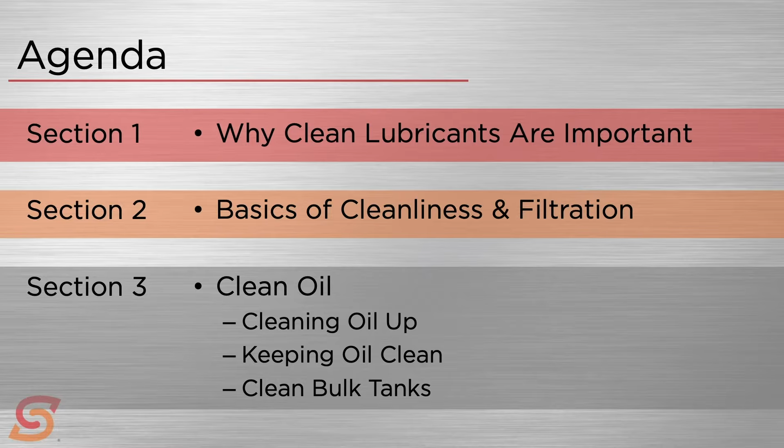So that's our agenda for the day, and we'll have a little question session after each one of those sections. So we'll kick off here with the need for cleaner lubricants and what drives the need for clean oils.

If you distill it all down and summarize it, it really comes down to component life, okay? All the different pieces of equipment, how long they live before they have to be repaired or replaced, the mean time between failures of things.

Your costs involved in that include, but are not limited to, just the cost of equipment, right? It's not just the cost of the hydraulic pump, the cylinder, or the gearbox, but there's also the cost in fixing and replacing it, the labor involved in that.

And then there's also the cost of overall downtime that it may cost your facility or your fleet. These costs are all important, they all add up, and they all trace their way back to the cost of the performance and the longevity of the individual components themselves.

So within a system, at least that's lubricant related—now we're not addressing all systems, we're sticking to the stuff that we deal with, lubricant related stuff—what are the more vulnerable components? What are the kind of things we're talking about when we talk about component life?

Well, most of these things are oil lubricated, particularly where the lubricant film is very small, because the smaller the lubricant film between two surfaces, the more impact a piece of dirt is going to have, right? That stands to reason.

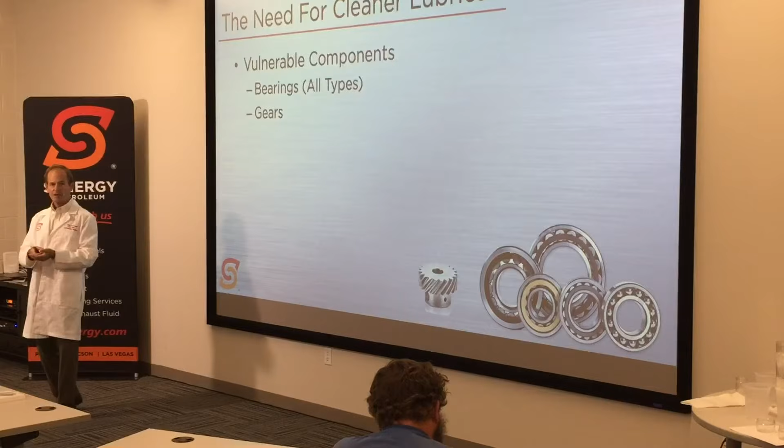Hydraulic pumps, okay—vane pumps operate at high speeds and high pressures with the tips of the vanes running against the ring. That's a very, very small clearance in there. You can wear out pumps very easily that way.

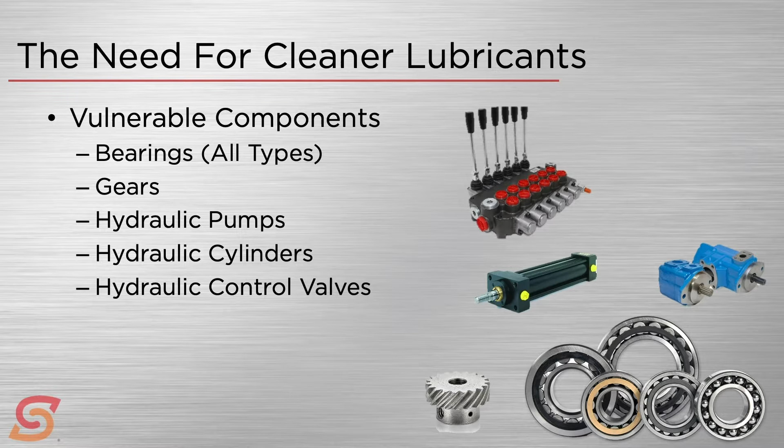Hydraulic cylinders—think of the openings in hydraulic cylinders and how many hydraulic cylinders leak because contaminants get into the hydraulic fluid. Hydraulic control valves are probably some of the most critical in terms of cleanliness, because the openings...

If you look at particularly a complex hydraulic control valve, lots of things like spools going into very carefully machined openings—this is 10,000th of an inch type tolerances or less. Just a little bit of dirt can cause spools to stick, and once spools start sticking in a control system, your control is compromised.

Another thing that happens in these hydraulic control systems with contaminated oil is that even very, very tiny particles rushing through a hydraulic control valve at high speed are kind of like a blasting media.

I mean, yeah, it's in slow motion, but if it's going under high pressures and high speed, you end up rounding the corners of some of the machined parts inside a control valve. And when your control valve channels start to get rounded corners, you lose some of the precise control you might be relying on from that valve.

You know, there are full day hydraulics courses just on control valves and doing this kind of stuff, so I'm not going to try to take you there, but hydraulic control valves are very critical to cleanliness.

Seals - a good way to damage a seal is to have dirty oil going through it. You get a nice soft seal working there, get some abrasive in there to wear it down really quick, and now your seal's no longer effective.

And even hydraulic hoses - some of this goes back to the media blasting example I was mentioning before. A lot of contaminant going through can weaken hoses from the inside. So that's the need for cleaner lubricants from a component and component failure perspective, because these are the things that'll cascade and cause some other problem that'll cost you your downtime.

How do we know, but how do we quantify what clean oil can do for us? How do we know that clean oil will make our components live longer or last longer? Besides the intuitive stuff, is there some evidence that this really happens this way?

They also sponsor and put on a couple of large industrial reliability and lubrication related trade shows every year. They send out weekly newsletters, as well as offer their consulting services. They've been around a fairly long time, very well known, certainly in the industrial world.

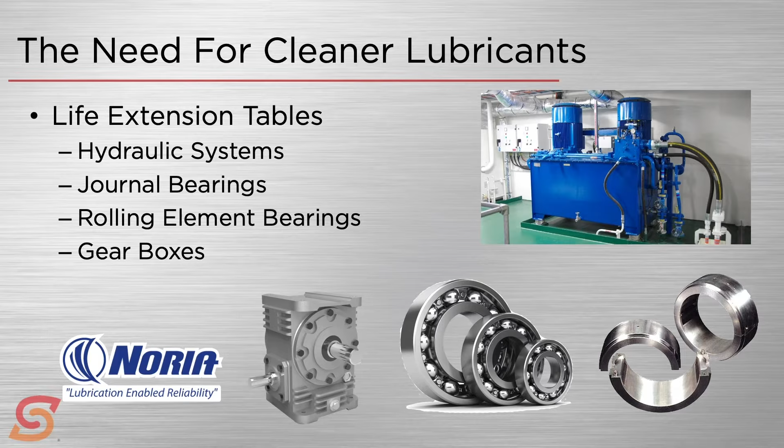So they come up with these life extension tables, and this is a life extension table, and this is how it works. It's pretty straightforward once you understand the gobbledygook, and you do have to understand the gobbledygook behind these ISO cleanliness codes, and we are going to touch on those in the second section. So just kind of follow with me for now.

But if the current oil you're getting now - we'll call this oil straight from the drum, typical oil from the drum - let's say is about... if that pointer's not going to work, maybe I'm using the wrong end. No - this oil is 22-20-17, okay? This is not filthy oil, but it's not clean oil exactly either.

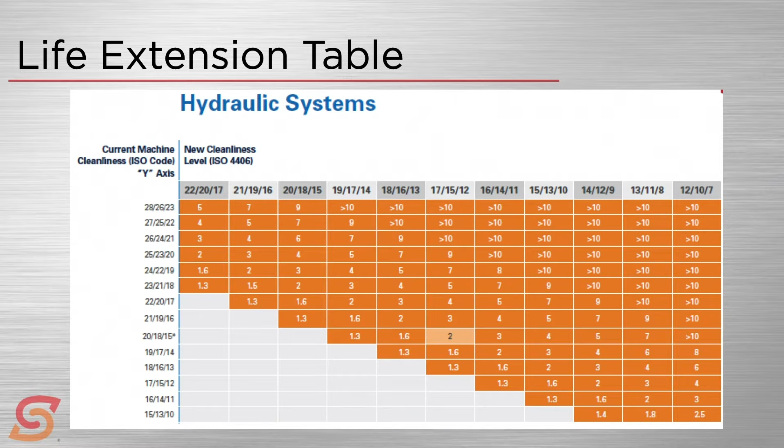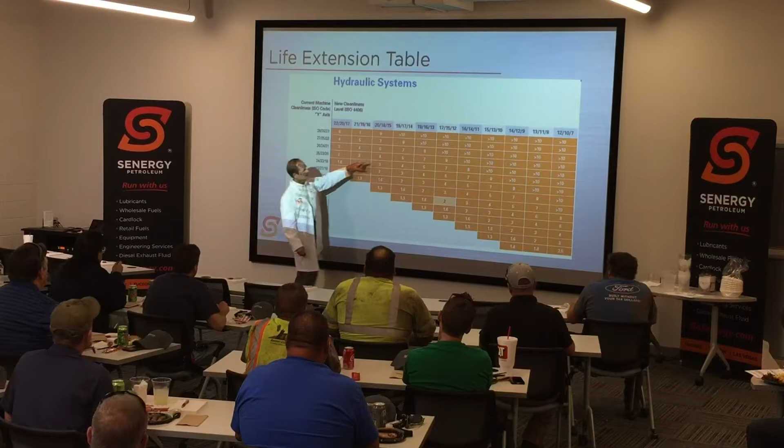But if you can take that oil that you're running in your hydraulic system and filter it, clean it up a bit, and get something a little more respectable, such as 18, 16, 13 - and hydraulic oils actually can clean up down to this range, hydraulic oils are really good at getting clean if you want to - but if you can go from 22-20-17 to an 18, 16, 13...

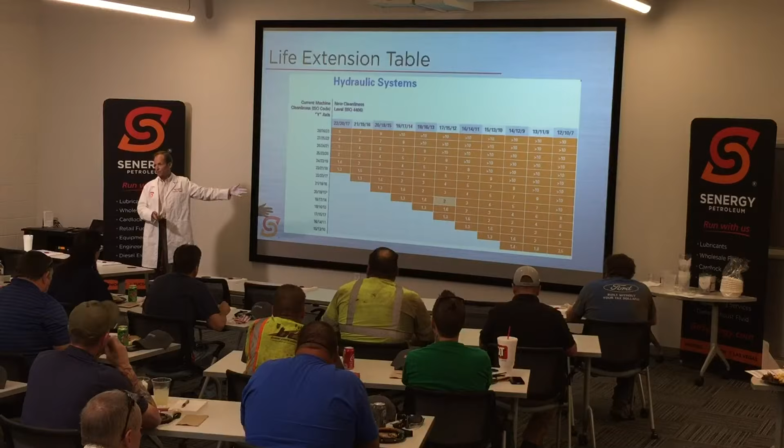This is the intersection of those two, the column and the row, right? Comes up with the number 3. And what that number 3 is telling you is that your hydraulic system components could last 3 times longer using that cleaner hydraulic fluid than they would with the dirty hydraulic fluid. Okay? All right? So it's not a number that was grabbed out of a hat.

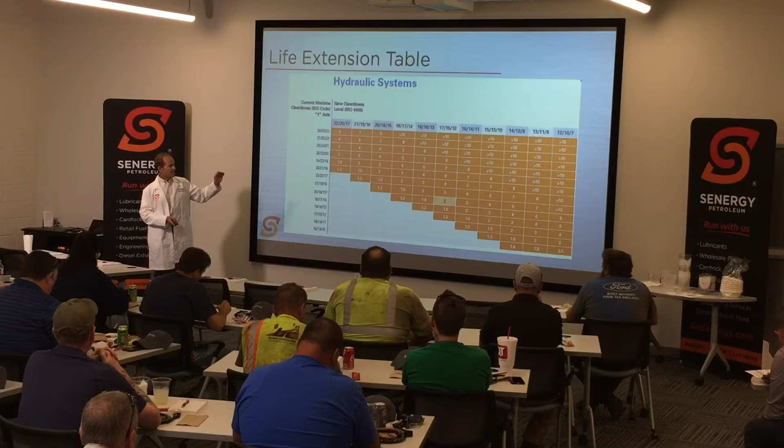This is a data-based number. I couldn't tell you what the standard deviation is on it, but that difference in cleanliness can make that much of a difference in the life of your hydraulic components. And that's how these life extension tables work.

And we have these for not only hydraulics, but I mentioned those other items as well. If you're interested in looking at them and taking one, over on Tim's table, I printed out some for each of these component things. So you can pick one up after the class on life extension tables.

So this cleanliness idea, like I said, Noria was a driving company behind it and has been for some time. But the gospel's been spreading, and there are a lot more people getting interested, including the component manufacturers and equipment manufacturers. By equipment manufacturer, I mean someone who's taking various components and making a big machine, and then they have some recommendations.

So the leader in that category is probably Caterpillar. They've been pushing this for some time now for all of their fluids. They have different cleanliness levels - some are the same, but with different cleanliness recommendations. I know of some of their larger mining customers who, because they are using highly cleaned and specially polished oil, Caterpillar is giving them extended warranties on their equipment. Caterpillar's putting their money where their mouth is. If you've ever gone through Caterpillar's equipment guide, they make it very clear that they want really clean oil.

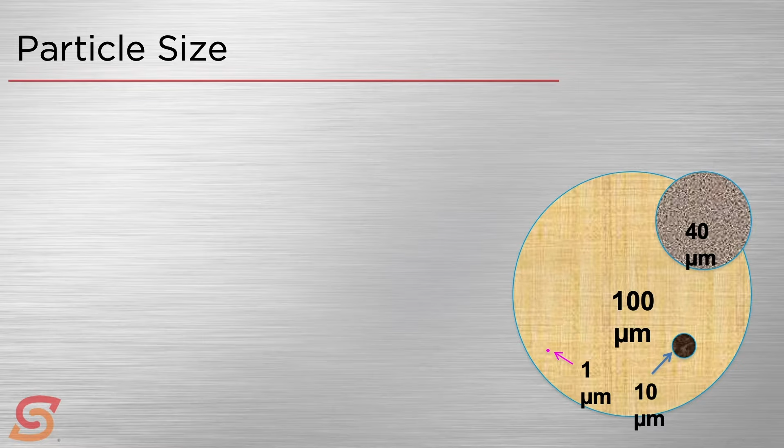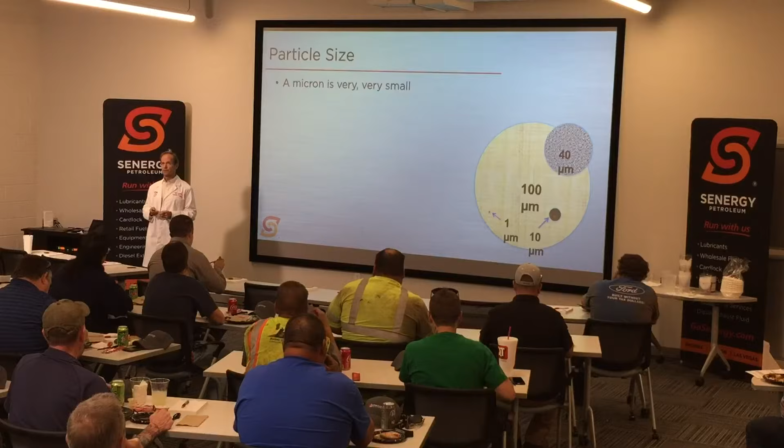So, Mr. Clean. The first fundamental we'll start with is particle size. Getting a grip on how small is part of getting a grip on how clean is clean. A micron is very, very tiny, and you always hear these filtration sizes in terms of microns. Microns are very, very small. Instead of telling you what millionth of an inch it is, get the idea that a human hair - the diameter of a human hair - is maybe around 70 microns. That's 70 of them.

Take a look at something like the visibility limit - the tiniest you can see is around 40 microns. A typical motor oil filter is 50 to 70 microns, something like that. If you're filtering stuff down in the 25 micron range, you're definitely filtering things that can't be seen. What that means is you can have a perfectly clear fluid of some sort and still have lots of 30 micron particles in there, and you'd never know it because you just can't see them.

Some other relative particle sizes: a grain of table salt is about 100 microns across. Talc powder is maybe 10 microns. And bacteria - imagine that's small stuff, right? Pretty invisible - that's in the 2 to 3 micron range. So when you hear of things filtered down in this range, that's very, very tiny filtration.

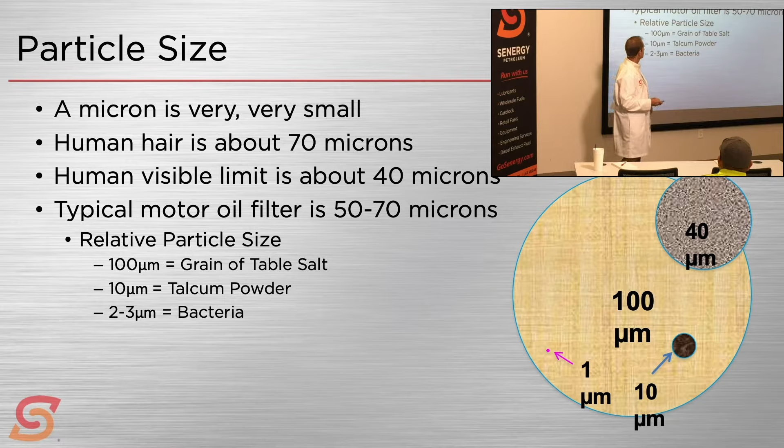Okay, so particle size is one of the important factors when we talk about filtration and look at the right type of filter to use.

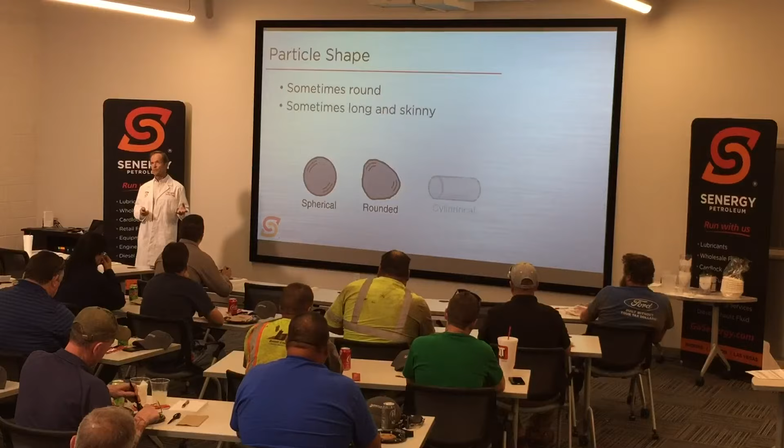Particle shape is another important factor. Most filter design, theory, and assumptions always assume that your contaminant is a spherical hard particle when they do various calculations. So sometimes they're spherical, but they're more likely to be roughly rounded, but not limited to that. Imagine a contaminant that could be cylindrical. This changes how you would approach filtering it and how your filter would handle it. Then what if you have a contaminant that might be spongy or kind of a glob that changes shape? It all affects what you're going to use to filter it and how effective your filtration might be. These are considerations that come into filter design and filter choice.

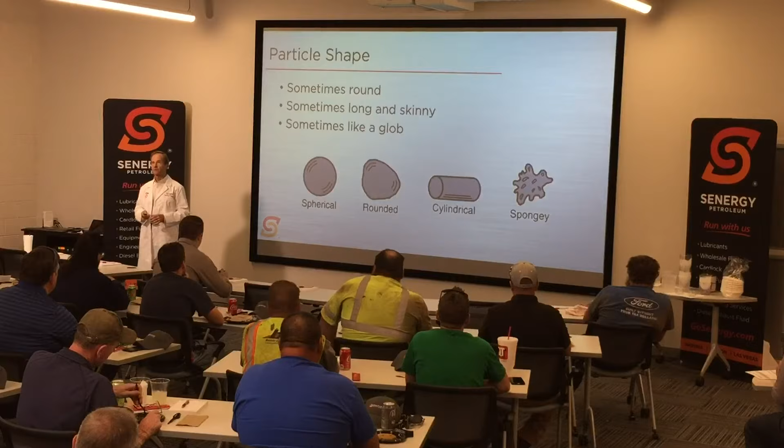Next up in our fundamentals series is how do we measure cleanliness? How do you know what's cleaner than something else? This is another one of these things we could have a whole class on, just this part of it and how we do it.

But the most common method used when talking about cleanliness, particularly in the lube oil world, is particle count. Within particle counting there are a whole bunch of methods to count particles and another bunch of methods to report how many you counted. So I'm going to try to reduce the confusion on this. You notice I didn't say I'm going to eliminate the confusion, because I'm not so sure that can be done.

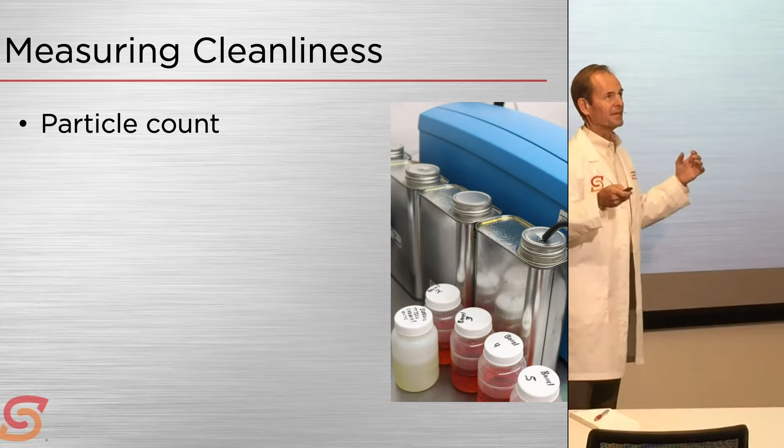But there are three real common methods sometimes described for using equipment to count particles. There literally is a method where you don't use a machine - you run some stuff through a little filter patch and look under a microscope at all the little particles down there. That's slow, tedious, and insane. So you buy one of these machines instead.

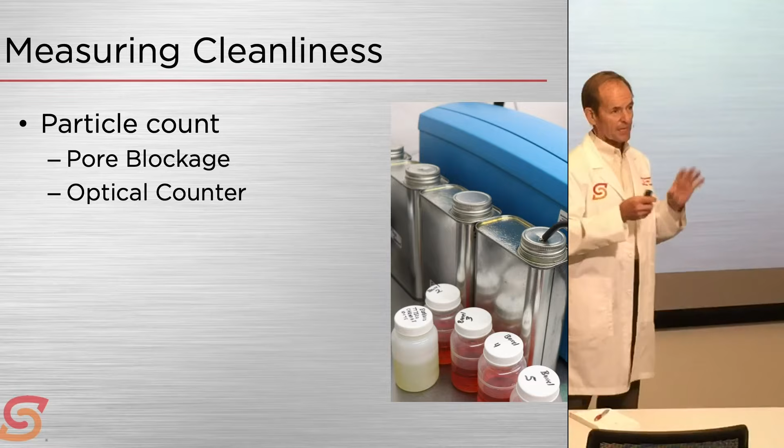One of the techniques is sometimes called pore blockage - that's a common technique, a company named Pall makes those. There are other optical counters, and an optical counter concept is pretty basic. You have a thin tube of your product going through, you're shining a light through it, and you've got a screen that's counting the little bitty shadows. Each shadow it's counting is a particle, and it does the math from that.

And then there's the LaserNet Fines, which is kind of like a highly sophisticated optical counter. It's using a focused laser. I've got a slide on that, so I won't describe it now, I'll show you in just a second. An important takeaway from particle counting - one of your takeaways of the day - your results are seldom identical between these three different methods. If you use the same method but machines made by two different manufacturers, you're still going to get results that are seldom identical. It's the nature of particle counting - there's a fair amount of variance that goes on with this stuff.

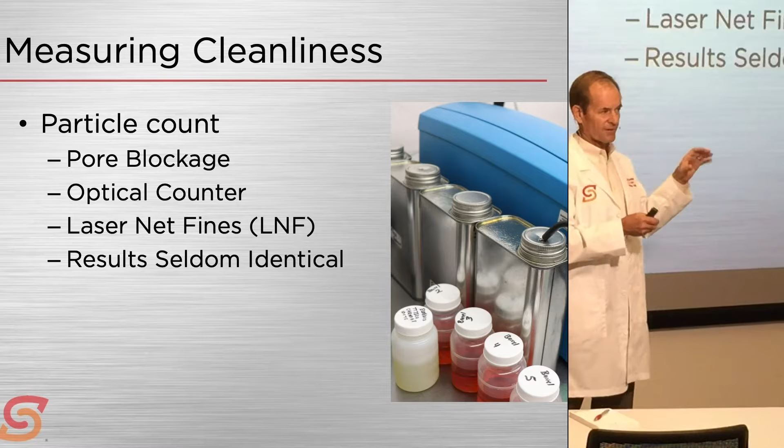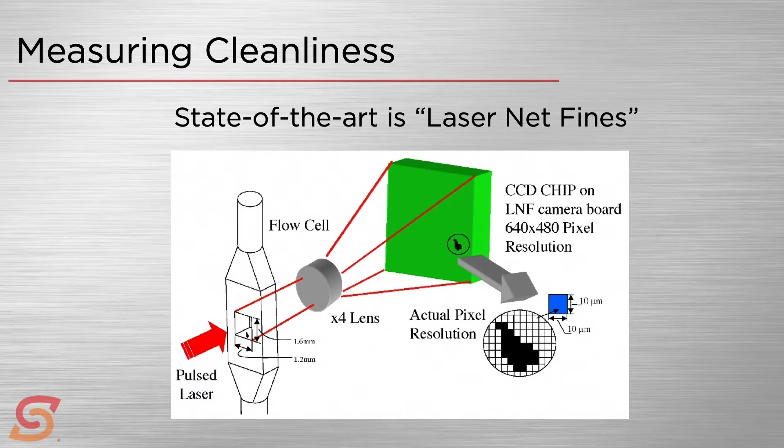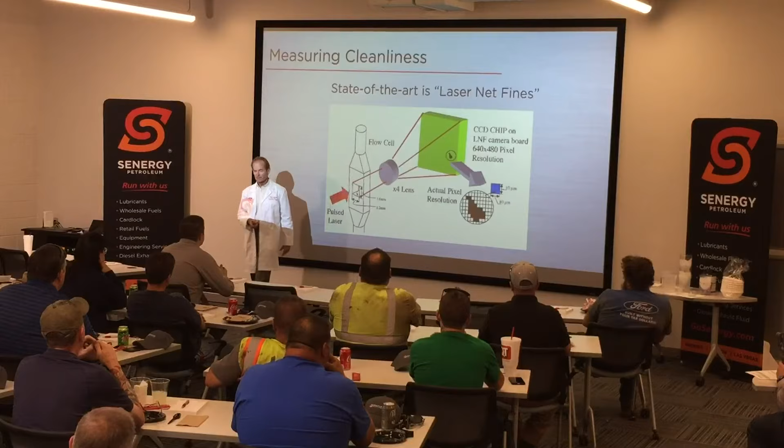Here's the graphic of how a LaserNet Fines unit works. You're shooting a pulsed laser through this thin tube of product going through here, and it's going out onto a high-def camera screen that picks up what the image is.

Now the nice thing about the LNF unit is it assigns a shape - it actually views the shape of the particle that it sees. And if, for instance, they can program it to determine that the shape is a glob of water and not a particle contaminant. So the LaserNet Fines are very good at reducing false positives from the presence of water in oil - that's one of its strengths.

It also can give you a report on the various shapes, and based on the shape of your contaminant you can get some clues as to where that contaminant might have come from. Is it a wear particle? Is it a dirt particle? So there's a lot more power behind what goes on in LaserNet Fines.

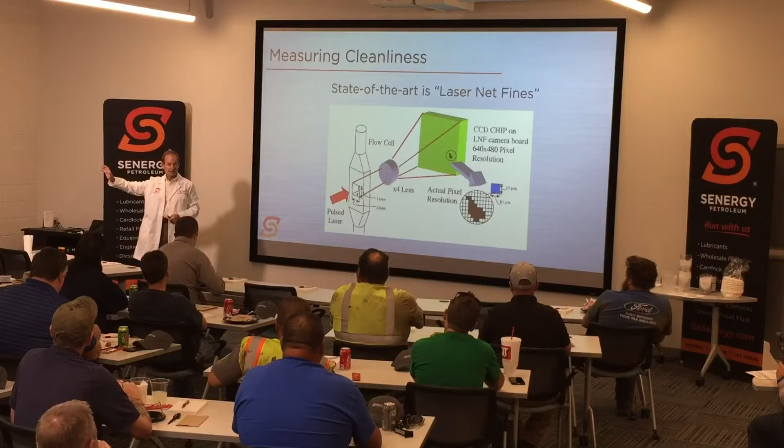Another subtle takeaway you may not pick up on, unless you remember this from last time, is that the cell it's going through is a very, very tiny opening. So you're getting not much more than a drop or two of oil going through here, telling you about the particles that are in your 5,000-gallon lube oil tank, or even a 500-gallon lube oil tank. So the lesson here is you have a very tiny sample speaking for the whole tank. You better take some care to make sure it's a representative sample, and that your sampling technique and sample container were very clean to start with.

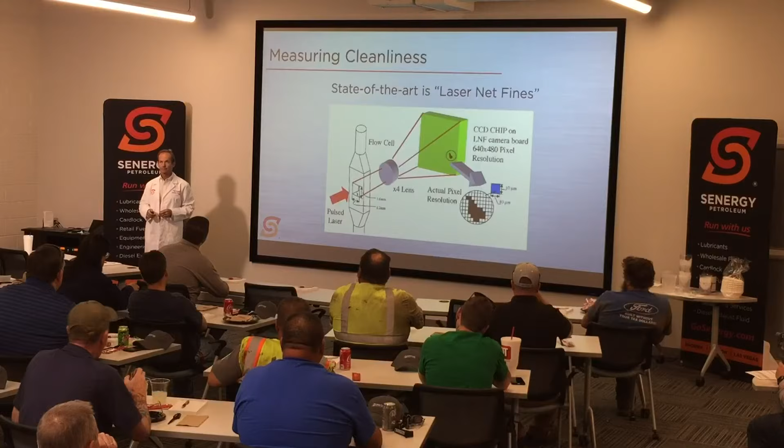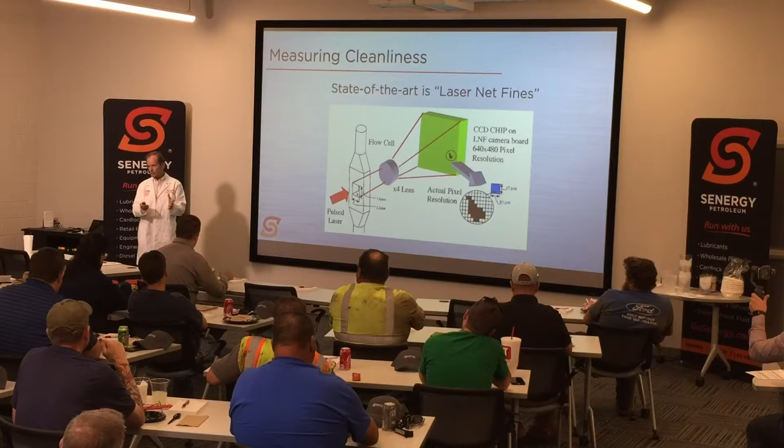Okay, so now we have a count coming out of here of particles, and it's going to count and tell you there's 14,592 particles measured going through the 14 micron filter or something like that. Okay, so how does that get reported in a way that's useful and makes sense?

We get to that part of measuring cleanliness, and that is the ISO cleanliness scale. Now there are probably at least three other known cleanliness scales besides the ISO scale that are sometimes reported, but by and large this is the vast majority of what you see, the ISO type particle count. The ISO particle count, being the most common, is reported as 3 values, or sometimes 2, depending on the machine and what you're looking for.

So what it's telling you a little bit is kind of what the particle size distribution is, what the dirt size profile is inside your sample.

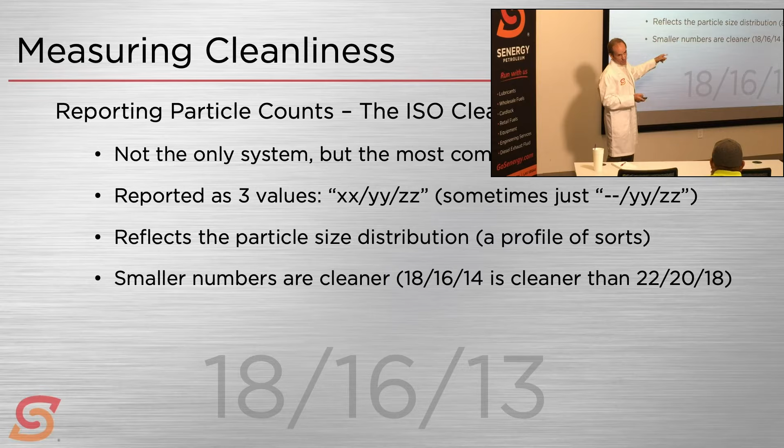And probably the most important takeaway, if you're not going to spend a couple days trying to understand particle counts, is that smaller numbers are cleaner. Right? 18, 16, 14 is cleaner than a 22, 20, 18.

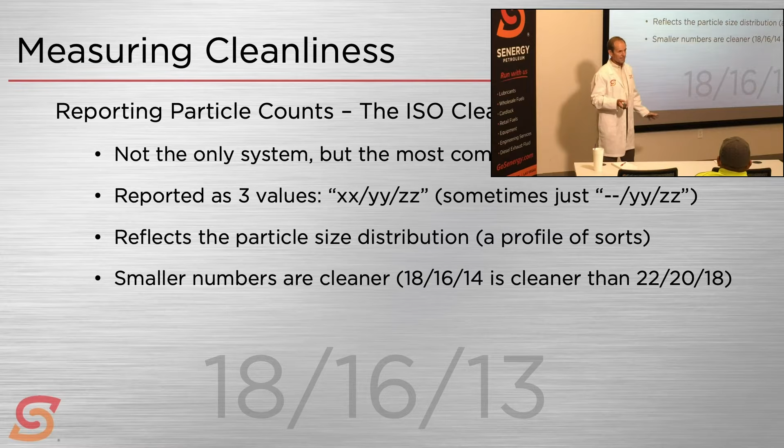You always see it in a descending scale. If you see something going along and it's going up, then something's mathematically wrong - it's a typo kind of thing. The way it's designed, you're going to catch more particles with a 4 micron filter than you do with a 6 micron filter, than you do with a 16 micron filter.

Only in the case where you're looking at some really, really clean oils, I have seen from time to time where a couple of these numbers might be identical. I've seen some products that were like 10, 6, 6 before, very, very clean stuff. That just happens to be, that goes back to the ISO cleanliness scale and how it's run.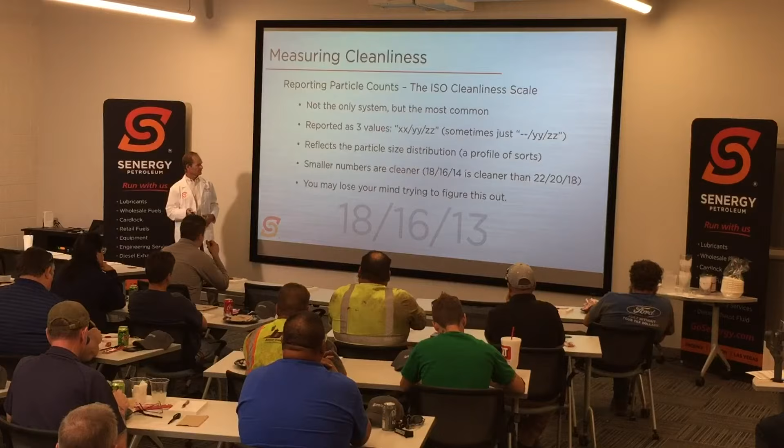And here's the real bottom line: if you spend too much time trying to figure this out, you will lose your mind. You guys remember I said this last time if you were here for fuels, and I still believe it because I've lost half of mine trying to figure this out. All right? So that's our measuring cleanliness fundamentals.

Now I want to talk a little bit about the filtration fundamentals themselves. We talked about this last time as well. There are a bunch of different types of filters. The kind that really apply to lubricants, at least in our domain - so we're not talking about air filters, for instance. In our domain, we're talking about cleaning up oils. So we can kind of think of the fundamentals in 3 different categories.

And the first type is a screen filter, right? Screen is a very intuitive filter. You guys remember my tennis racket filter if you were here for the last presentation we did. Another good analogy is what you do in your pool if you have a leaf net, okay? A leaf net for taking leaves out of your pool is a screen. It's doing some basic filtering.

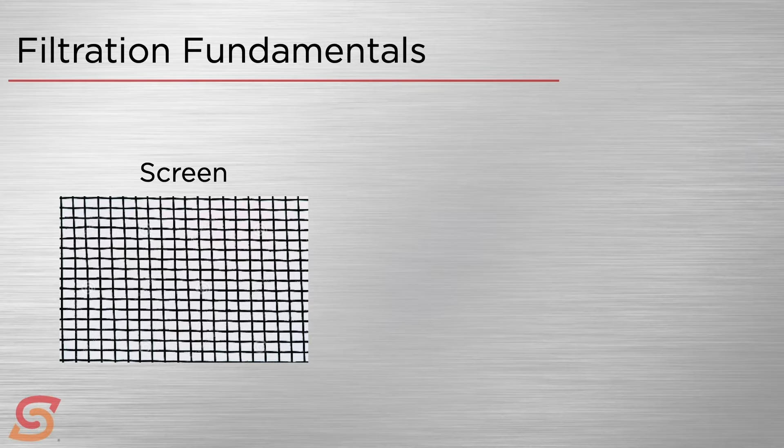But what happens if you had a little windstorm come through, right? That net will fill up with leaves pretty quick. You're always having to dump it out. So one of the problems with a basic screen type of filter is it fills up and blinds up pretty quickly. In addition, you've got lots of small stuff that still gets through, okay?

The next category of typical filter is the depth media. Depth media is more efficient for any number of reasons. Depth media usually consists of these little twisted and tortuous passages through some sort of media, and sometimes even the passages can change as the media is there. And it traps stuff of various sizes, and it holds a lot more in it before it gets filled up because of the nature of this twisting stuff.

And to go back to our swimming pool analogy, this would be like the sand filter that you run, or a DE filter in your system. That's a depth media filter doing that kind of cleaning. So usually an improvement. Then the third type of filter that we'll see sometimes is adsorbent media.

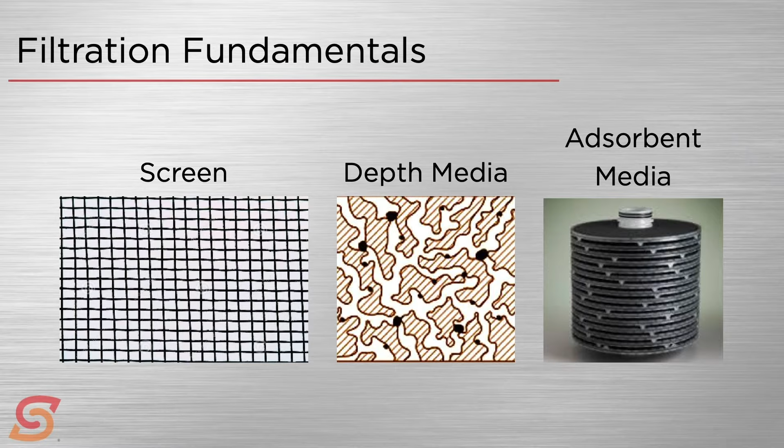Adsorbent media works by not a physical filtration, but a chemical filtration. So you have a contaminant in your oil coming through, you send it through an adsorbent filter, and your contaminant prefers to be in the adsorbent material than it does in the oil. So it leaves the oil and goes into the adsorbent material, and your oil comes out clean.

All right, and that's where we go to the demo. Okay, so all you guys who were here before, you have to wake up, because this is a different demo. You notice I don't have the tennis racket up here.

Let's try this live and see how this works. Okay, we're going to take our water and put in some contaminant. In this case, it's going to be blue food coloring.

Blue food coloring is a contaminant that is not a particle. Blue food dye is not a particle, it dissolves into the water. So we now have a contaminant dissolved in the water. How do we clean this up?

All right, I'm going to pour a sample here in this jar so that we have a nice before sample for comparison later.

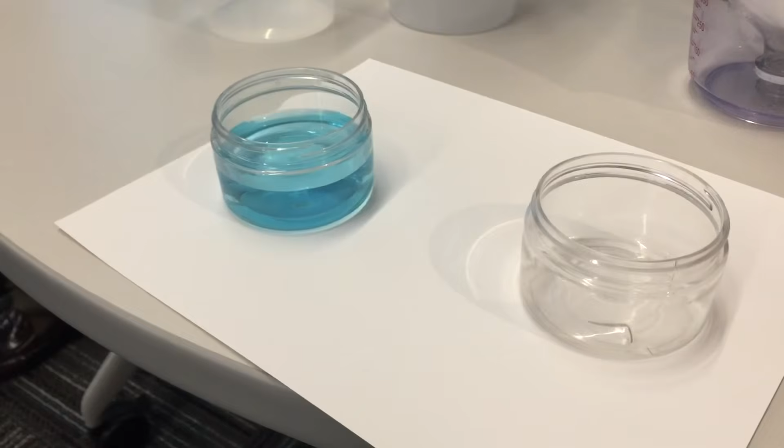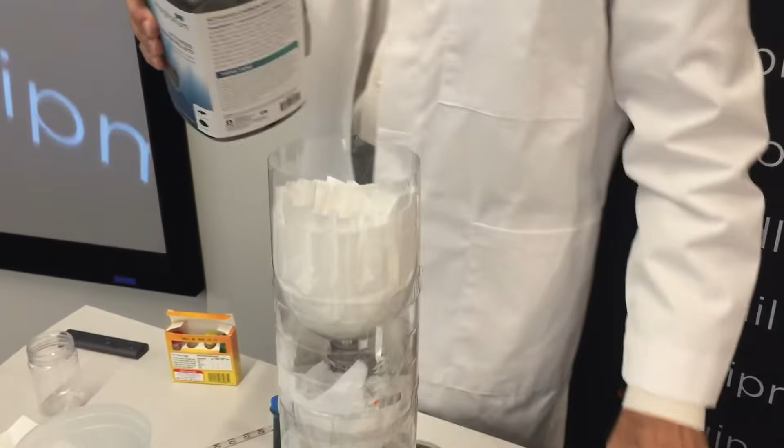We are going to use our high-end, specially constructed filter device that I've created out of some 2-liter bottles, some coffee filters, and some activated charcoal used for aquariums. It's built so I could have multi-stage filtration, and I'll finish off this top stage for you as I make it. Let's get this stuff loaded up good here.

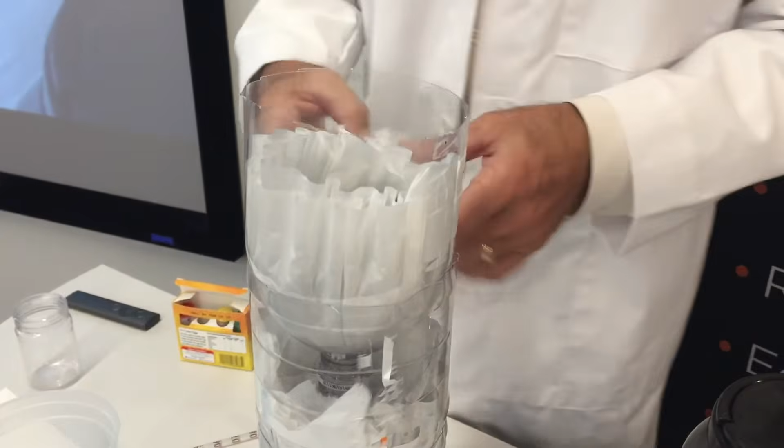All right, that spread out in there. And we'll start pouring in our contaminated solution.

And I know you all are saying, what can possibly go wrong?

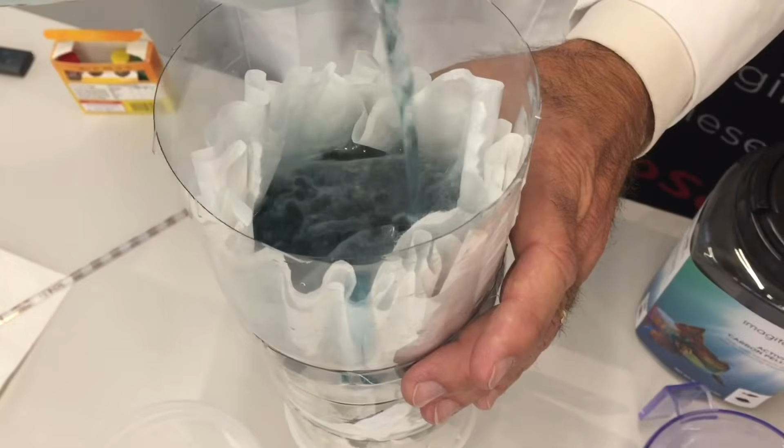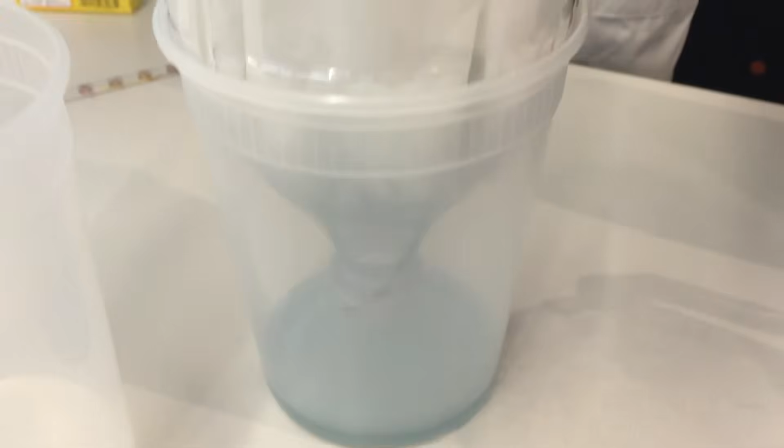Now, one of the problems or challenges of this crude filter device that I've made is it's not terribly efficient. I don't have really good surface-to-surface contact. I could have taken these activated charcoal granules and ground them up further, for instance, to maximize the surface area, and some other things.

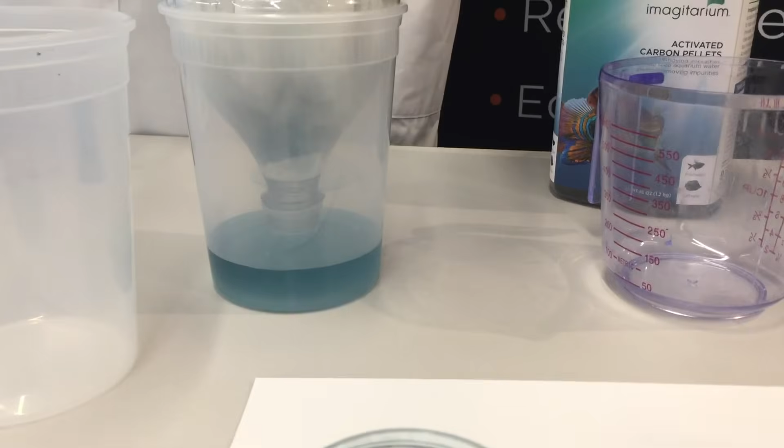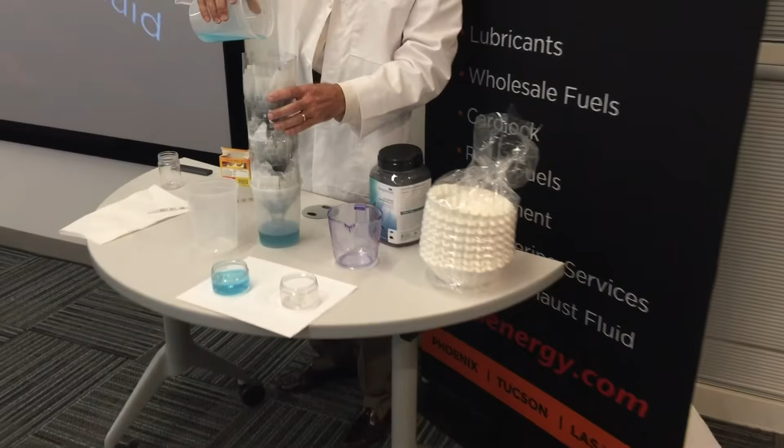Because if you'll notice in the very bottom of this, you'll see that it's not cleared up, right? So what we are going to do to assist this is just put this stuff through multiple times, nice and slow.

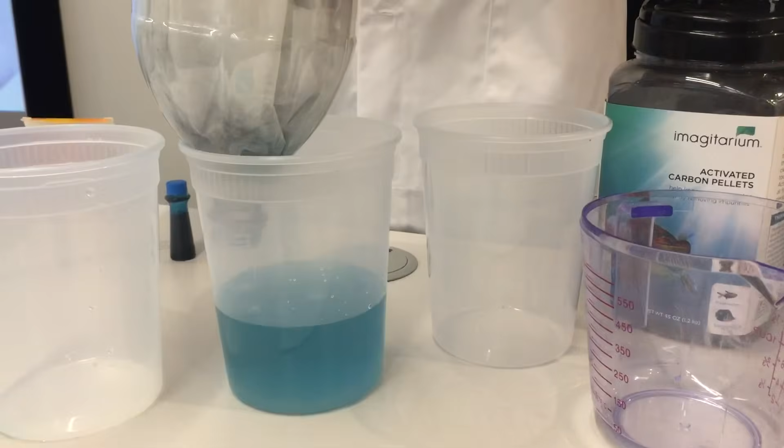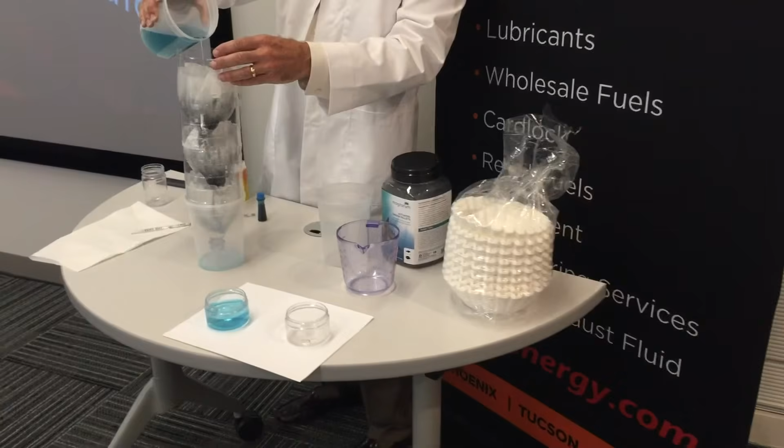Now I'm going to invite my capable assistant, Joe, to come over here. This is Joe. Joe, come on over. And by referring to Joe as capable assistant, what I mean is I'm going to give him the tedious work. So Joe, you just keep pouring that through there nice and slow and gentle, and do that same back and forth. All right.

So while Joe is taking care of the pumping portion and the recycle portion, I'm going to go on with a couple more things on our filtration fundamentals that I have coming up here.

Okay, now we understand. I talked a little bit about the filter types, and we've talked about filter sizing. Something I'm going to give you is a little useful information about buying filters, or at least what to look for when you get filters. So paying attention to the Micron rating.

Micron rating is how filters and their ability to clean stuff up is usually defined. Most filters will advertise that they filter to such and such a Micron rating. What does that mean? Because usually they'll use this terminology, either 25 micron nominal filter or 25 micron absolute filter.

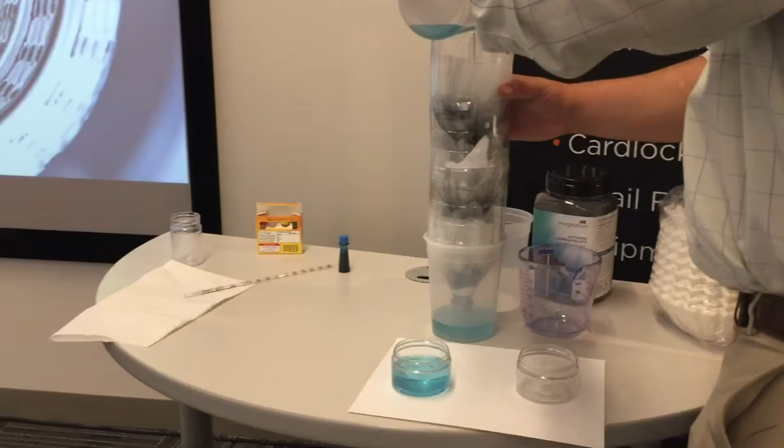Now the next thing you need to know is that absolute doesn't always mean absolute, okay? When you have a 25 micron filter, you will get some particles that are larger than 25 microns coming out the backside. And that is expressed in another terminology in the filter industry called the efficiency, or the beta ratio. Beta ratio has to do with how much sneaks out.

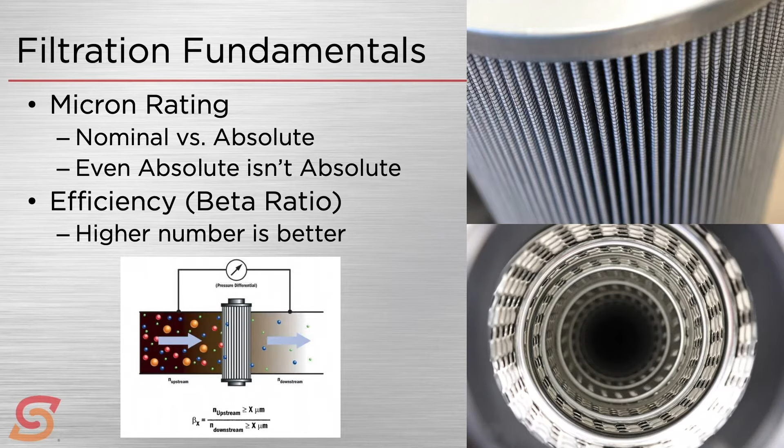So the example here I would give is if you have 200 particles coming in this way into your filter, but you only get one of them downstream, you have a beta ratio of 200 to 1.

So that's a beta 200 filter. Let's say it was 25 microns, that's a 25 micron beta 200 filter. If that filter is built a little better, and now you can get 2,000 particles up here before one sneaks through, well, that's a beta ratio of 2,000. A beta ratio of 2,000 is a pretty darn good filter. These are some of the best you can get, at least in the lubricants world. These are the kinds of filters we use as part of our IsoClean filtration program. And that's not to say 200 is bad, but just know that the higher number in terms of beta ratio is better.

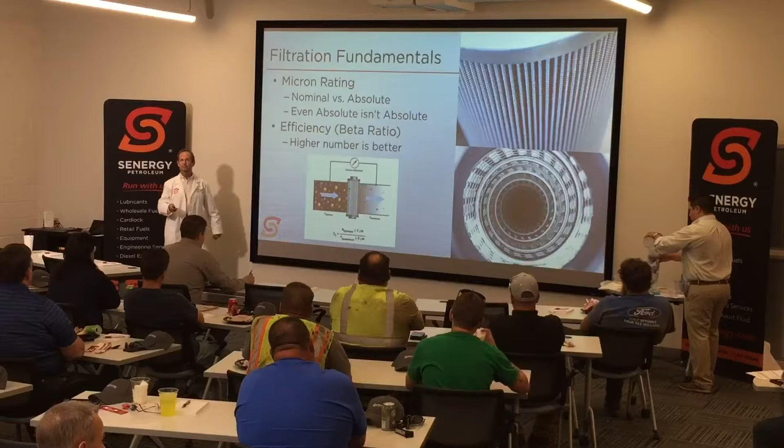This next slide is something completely new. We didn't address this in fuels filtration, because fuels are different than lubes in this way. The question is, can you filter too much? Can you overfilter? Not an issue with fuels generally, because there's so little in fuels to start with, it's pretty basic stuff. Oils are a different story. Oils are made up of a base stock, the goopy stuff, plus the additives. The real issue comes down to the additives, because it depends on what the additives are. It is possible to overfilter certain oils, not all of them, but a select few additives are more vulnerable to getting filtered out.

These include, for instance, anti-foam additives. Anti-foam additives are very large molecules, and they also don't dissolve particularly well into the oil, so they're kind of undissolved in there. The same thing with viscosity index improvers, they're huge, huge molecules. And I forgot to put it up here, but there are also certain cold flow improvers, additives to improve cold flow of oil at cold temperatures to prevent waxy buildup. Some of those things are in the same category where they could be affected by too much filtration.

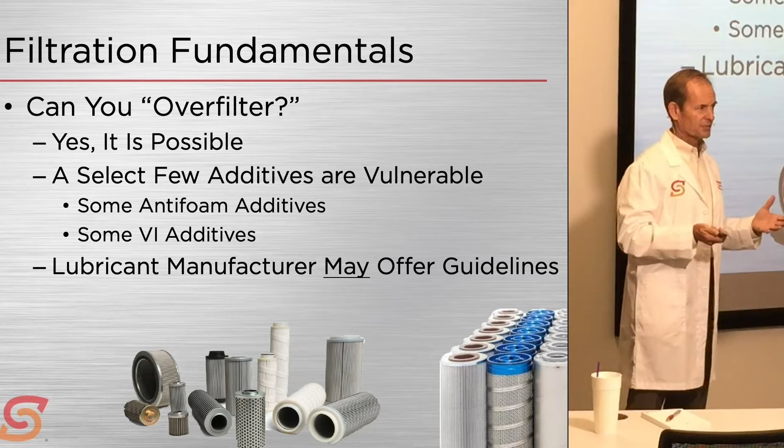How do you know? Well, the lube manufacturer may offer some filtration guidelines, and notice I say 'may.' We get a lot of information from Chevron on this, because Chevron has a program we're part of, offered to their distributors, called the IsoClean program. It involves cleaning lubricants to an extremely high degree for customers who are interested, such as some of these mines we service that get extended Cat warranties because they get ultra-filtered oil. So Chevron put together this very comprehensive program, including equipment and recommendations.

They've taken their products and done a bunch of experimentation filtering them to find out how tight they can filter before there's any problems. So they publish guidelines to people like us who are actually doing the filtration. We have this big chart of Chevron products and how tight we can filter them. That information's known definitely from Chevron, who's kind of a leader in this area, so they have probably the most comprehensive slate of filtration information. But some of this is known to other suppliers too, maybe someone asked them about their engine oil one time, so they did some research and found out you can take their engine oil down to 15 microns with no problem.

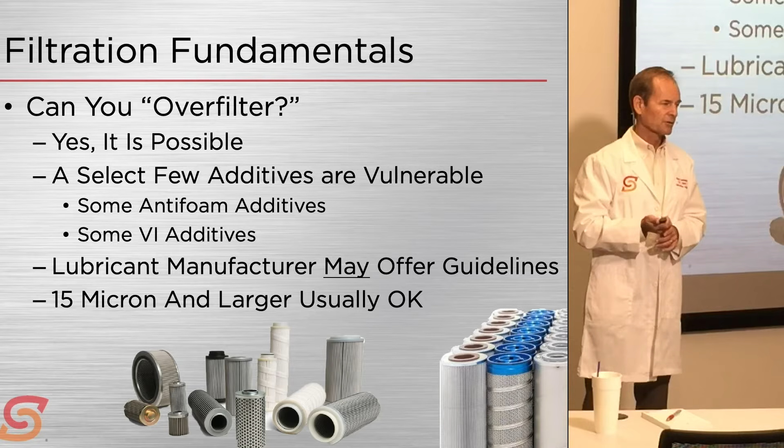And that is my rule of thumb. Generally, most oils will do fine at 15 microns or larger. That's a big enough opening, particularly if the fluid is warmed, I'm saying warmed, 90, 100 degrees, something like that. Everything's solubilized, everything is fine going through a 15 micron filter.

All right. So far, any questions about that? Any questions about the fundamentals of filtration or the fundamentals of cleanliness and particle size and particle count?

Yep, Lucas oil stabilizers, the question is whether they're likely to get filtered out over time. I don't know that for a fact. I do know that chemically speaking, the stuff in a typical oil stabilizer, well, I've got to be careful here because what Lucas calls an oil stabilizer may have additives in there I'm not aware of. Isn't that a pretty thick product to start with? Yeah, and what they have in there may be related to what I described as the viscosity index improver, which chemically speaking is this very huge molecule. So a filter might actually grab something like that if that's the kind of technology they're using.

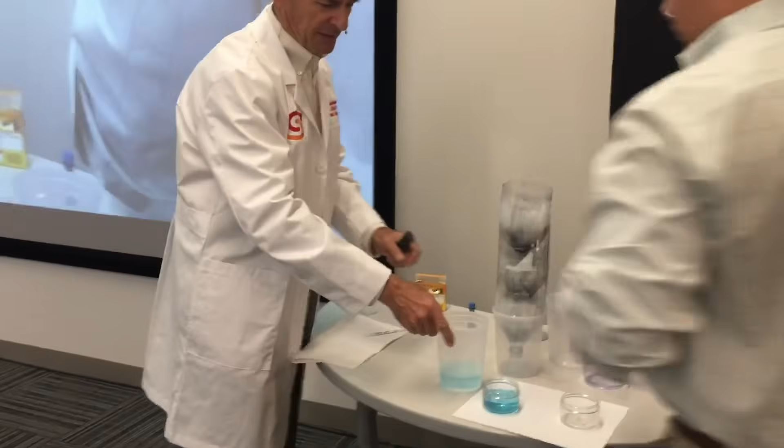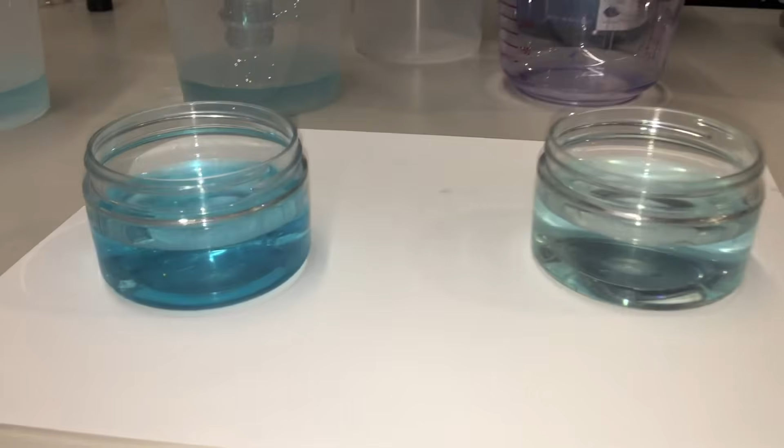This isn't cleared up yet, definitely has a blue tinge. But if you can see on the screen here, it's definitely gotten cleaner, cleared up quite a bit compared to the starting one. And again, these aren't particles, this is dissolved stuff, and it's because the dissolved stuff preferred to be in the activated carbon as opposed to in the water.

So hopefully that'll give you some insight as to how the adsorption filters work. Any questions about the experiment, since we're at question time?

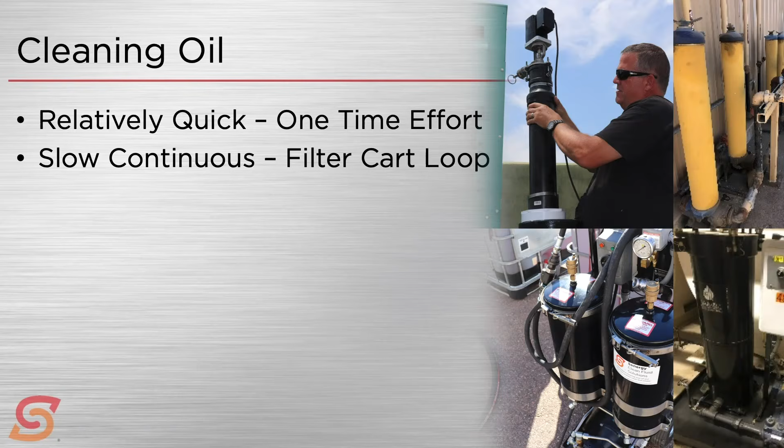You can also do what I call the slow motion version, and that is hook up what's called a bypass filter, sometimes referred to as a kidney loop filter. These things are on skids or carts. You hook it up to an outlet somewhere, cycle it back in, and just let it run and run - it's a 24/7 kind of thing. It's only taking off a small portion of the oil each time, running it through a very tiny filter and returning it there.

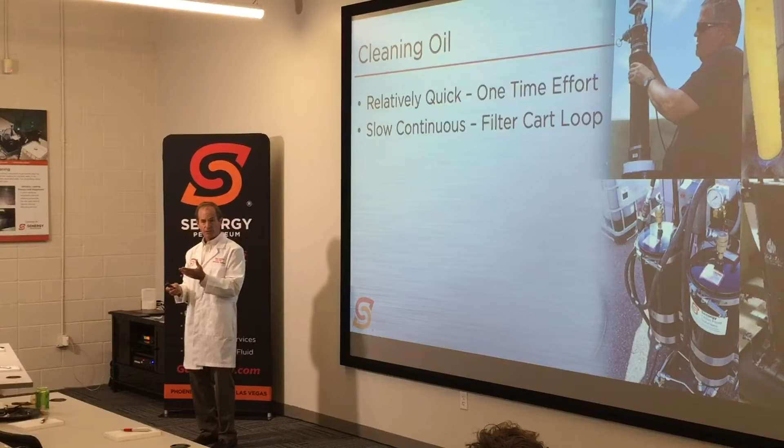And you don't have to have the tank offline - you don't have to stop your operations. If this is engine oil and you're still changing oil, you still pump oil from it to service the next vehicle, and you take regular tests. We've done this in some places where you come in once a day, because it's a slow motion thing - you pull a sample, do a particle count on it, and watch your particle count march its way down until you hit whatever your target was, whatever cleanliness level the OEM wanted, and then call it good. You got it cleaned up.

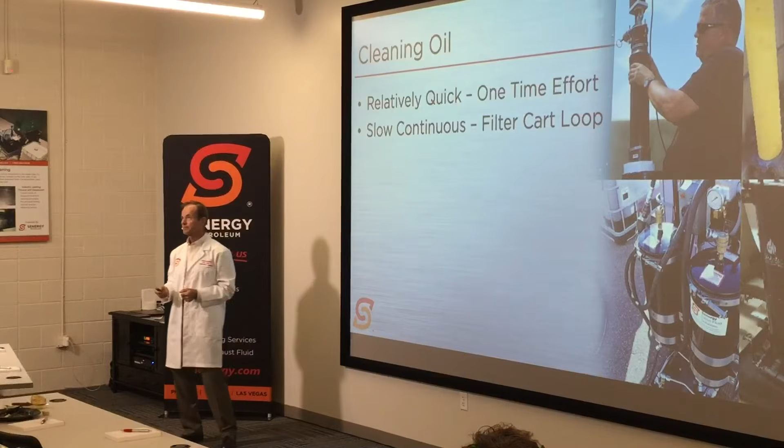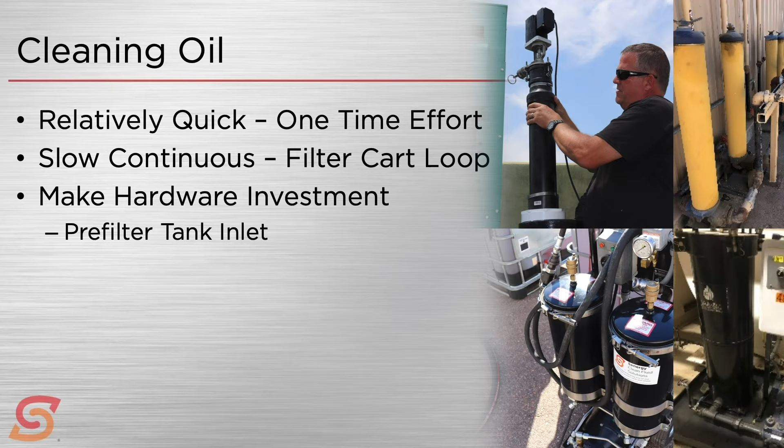You can do some other stuff as far as having clean initial oil in your bulk tank through various hardware investments - you can put a filter on the tank inlet side of things. That's what this picture of those yellow filters shows, out at one of our customers. We hook up to a cam lock just on the other side of that when we offload our truck, and it goes through those yellow filters on the way into their bulk tank, so they're getting it cleaned there. Now these folks happen to clean it even after it comes out of their tank too - they get really clean oil.

Another thing you could do is install a permanent kidney loop. So instead of a skid or a cart, you could have a dedicated pump and filter system that's always running on this stuff and always keeping it clean. And you don't have to worry about ingression problems. That's the picture on the far lower right that you can barely determine what it is.

You can put a filtration unit on the dispensing side of things, a last chance filter. This is a pretty good idea. But as the case with all filters, maintaining your filter has to be important, right?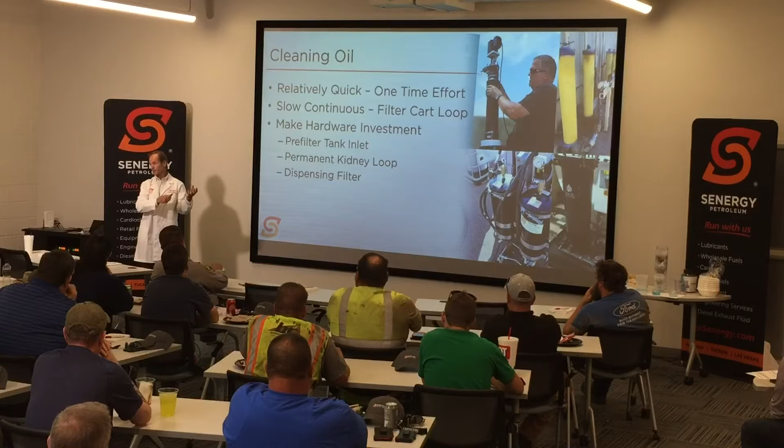If your filter gets blocked, almost all filters or filter housing designs are designed so that instead of exploding, they bypass the fluid flow. So if you've got a filter that's all plugged with stuff, your oil coming by there gets bypassed, you're essentially getting unfiltered oil, but you're under the impression that it is filtered because there's a canister screwed on there, right? So you need to have either a maintenance practice to change the filters, set up differential gauges, or some sort of indicator when a filter needs to be changed.

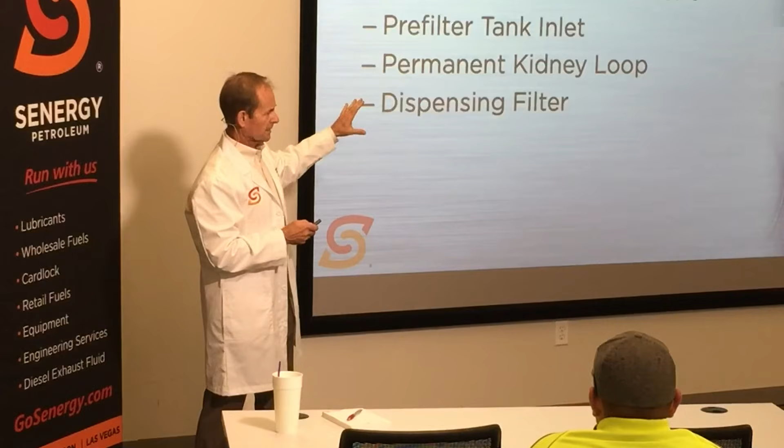Okay, so that's what you do for receiving and holding clean oil in a bulk tank situation.

Another thing you can do as far as clean oil is to buy it really, really clean in the first place. Okay, get ultra clean filtered oil.

This graphic here, this is our IsoClean skid. You can see we got 4 filter towers in there, and what you don't see in the background is we have a whole bunch of storage canisters for the filters, because we have a set of filters for engine oil, a set for gear oil, a set for hydraulic oil, a set for some other oils, to avoid cross-contamination.

This filter skid gets hooked up to a 330-gallon tote. And it just cycles, not unlike a kidney loop, except it's cycling the whole thing, and I think you do it a maximum of 10 times. And you bring the cleanliness levels extremely clean. It's a relatively new idea. Chevron's the only oil company that's embraced this, I'd say, wholeheartedly.

Other oil companies have interest in it, and you see it done on a spot basis. But Chevron put together this IsoClean program with lots of support and a structure so that distributors like ourselves could get involved in it. So there's not a lot of suppliers in the market. And one of the things that, if somebody's knocking on your door offering to sell clean filtered product, because I'm not saying we're the only people that can do it, but we do offer is certification.

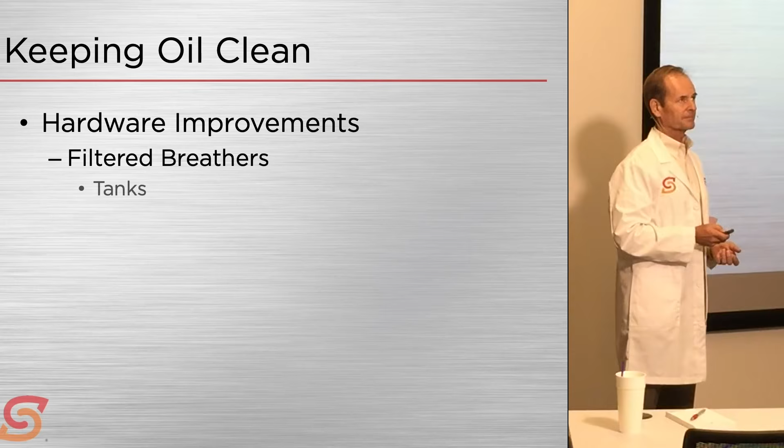You can put filtered breathers like this on a tank. You can even put them on drums. If you got a drum of product, and especially if it's a drum of product that doesn't turn really quick, get a filtered breather on there.

Okay, another hardware item, secure openings. Many tanks out there have just flip-top lids. Many have lids that are non-existent. Having a lid that's secure against ingression, very important, whether it's water and dirt. That's a fairly simple hardware upgrade, both for tanks and for drums.

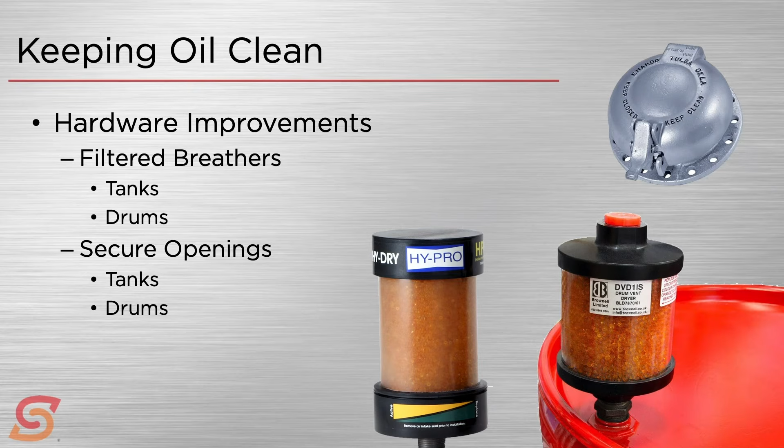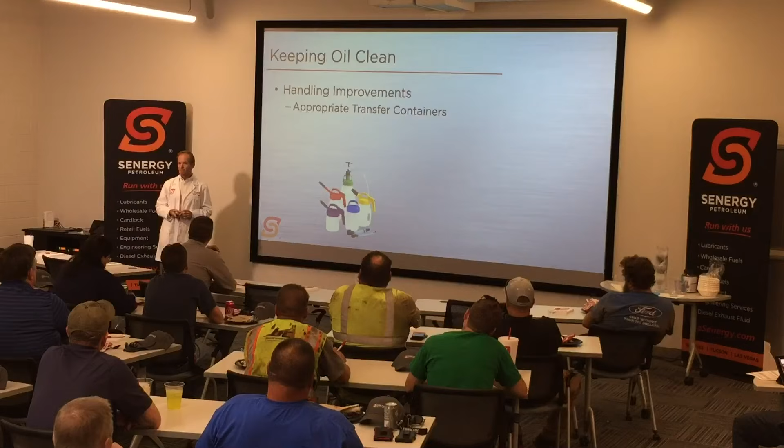And then there's when handling your lubes, some things you can do about keeping them clean. Appropriate transfer containers. This is a nice way of saying don't use that old 5-gallon bucket that you use to transfer it from your oil storage over to the truck in bay 6 that's getting it changed. In this case, I like these color-coded kind of things.

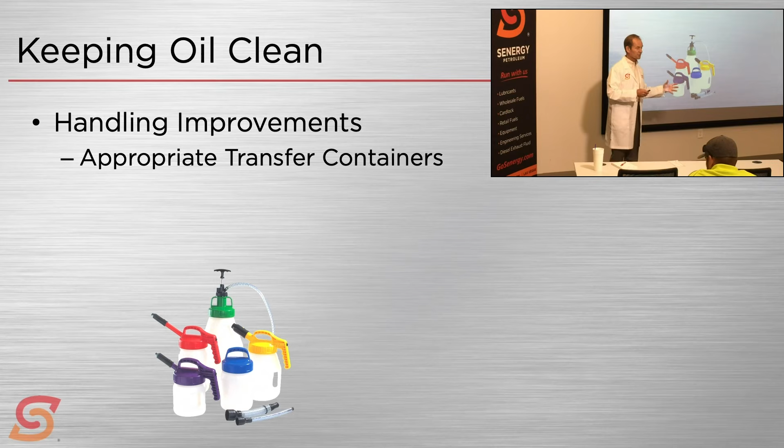You put your transmission fluid in the red stuff, the engine oil always goes in the yellow stuff, the gear oil is always in the purple one. You reduce cross-contamination between different products, much less it's covered with covered spouts. Everything stays much cleaner. Get the appropriate transfer containers.

I was somewhere last week or the week before, and I watched them use one of those zinc pour spout containers. Zinc pour spout containers may be good for your gardening, but zinc is not very compatible with things like hydraulic oil and motor oil. They do not play well together, much less the thing had no cover on it, then the guy just cleaned it out with a rag. So appropriate transfer containers, a big upgrade for you.

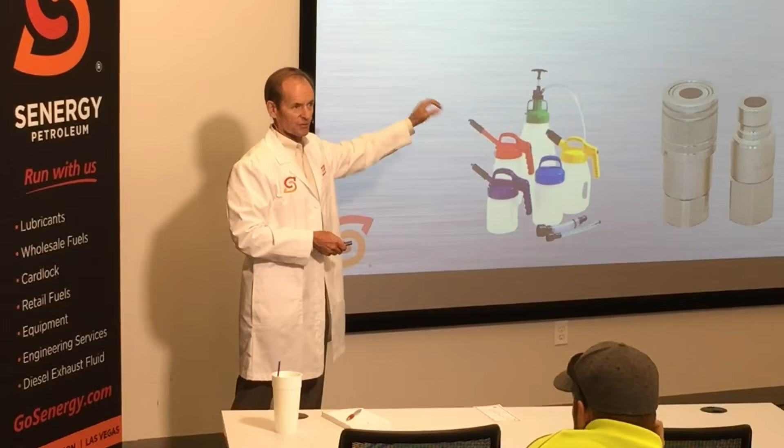Quick connect fittings. If somehow you're using a cart, if you have a pump that's used in multiple places, quick connect fittings like these with flat ends on them, so you don't have as much stuff that can build up in them. In fact, they actually make plastic caps that even go over these for cleanliness. Any kind of quick connect fitting, very helpful, again, at keeping stuff really clean.

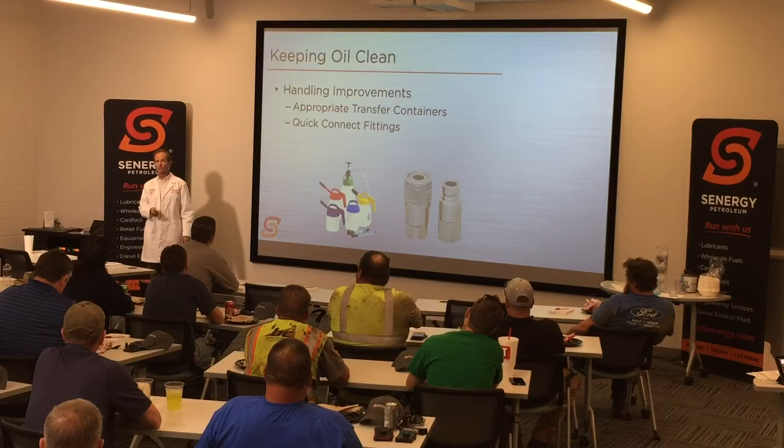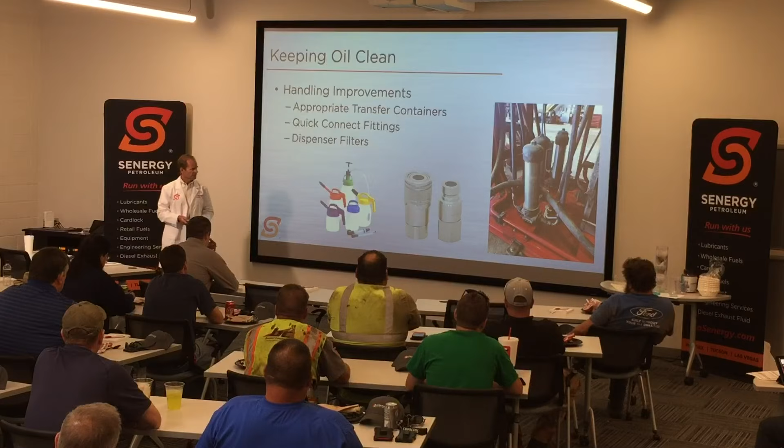And once again, putting filters on the outlet side of your lubes, like this customer did. These are, I want to say, a 15 micron last chance filter, to get the product and be sure it's clean on its way into the crankcase.

And then the third thing I wanted to mention in this section has to do with tank cleaning. You've got clean oil - don't put it in a dirty tank. That should make a lot of sense to all. And we've got a lot of experience with dirty tanks. Cleaning up a dirty tank is very contaminant dependent. So cleaning a tank is not a one-size-fits-all situation.

And if you have a tank thing that you want to talk to us about, we would send somebody out there to take a sample and take a look inside to see what we're up against first. This is not necessarily a quote over the phone kind of thing.

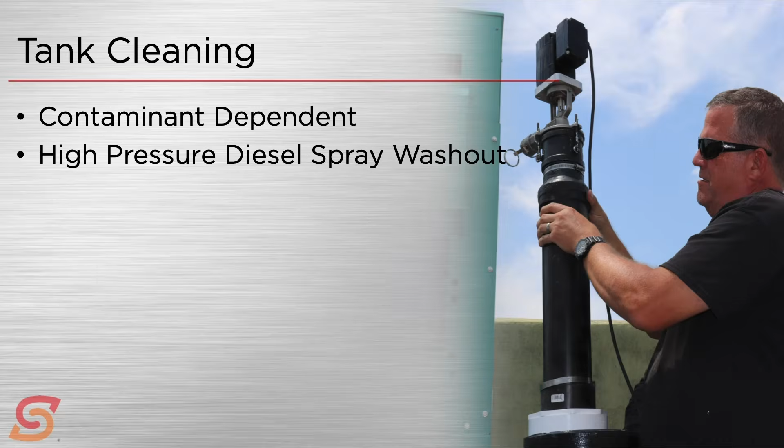For instance, if you've just got dust and dirt and debris and typical particle stuff, you can do a diesel high pressure spray washout. You just knock all the stuff down, you flush it all together, you suction it all up, and you can end up with a clean tank.

But sometimes you've got stuff that's built up in that tank - some sort of additive dropout, some sort of varnish, some other contaminant that you never could spray off. So you have to go at it with a chemical approach. We've done this before too. Figure out what your contaminant is, you go in there with special chemistry to go after it. That takes longer, it's a little more elaborate. You've got to do some extra flushing to get stuff cleared out afterwards.

And then there's the case where you may have to actually go in there with a putty knife - some confined space work to get stuff cleaned out. That happens too, and we've been involved in those kind of projects.

Are there any questions about anything from getting a hold of clean oil, cleaning up your oil, procuring clean oil, or cleaning tanks? Anything in those? Because that about does it for me up here.